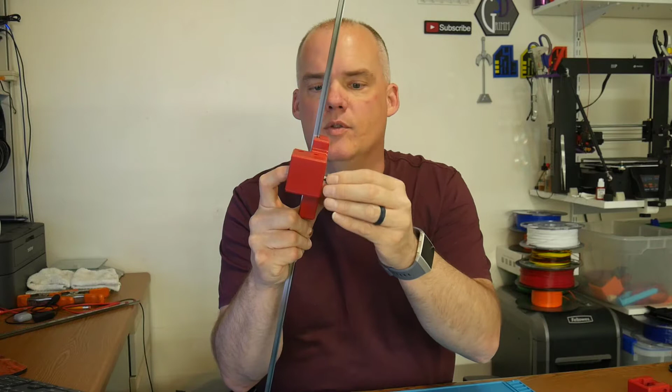And then this one is the first one that I've actually had that I could screw onto the carriages on the rail, had plenty of clearance on the end, so the rail moves up and down just fine. I still have not even tried to put this on the printer itself, but in all of them I've been able to create this little carriage right here that goes in there for the belt, and includes a nut on the back that will allow you to tighten or loosen the belt at will, which I think is pretty important as it pulls that shuttle in there and back out.

So that part worked perfectly. I was able to measure that and get that in there pretty well. But as far as getting all of these pieces, or this one main piece, all measured up and ready to go, let me show you how I did it. I don't know that it was the best way, but I'll show you my process.

I did the whole thing through DesignSpark Mechanical, as I almost always do. That software really works well for things like this, and I put a playlist up there wherever it goes for some help videos that I've got for starting out in DesignSpark. I don't have a lot of videos there yet, but they are coming.

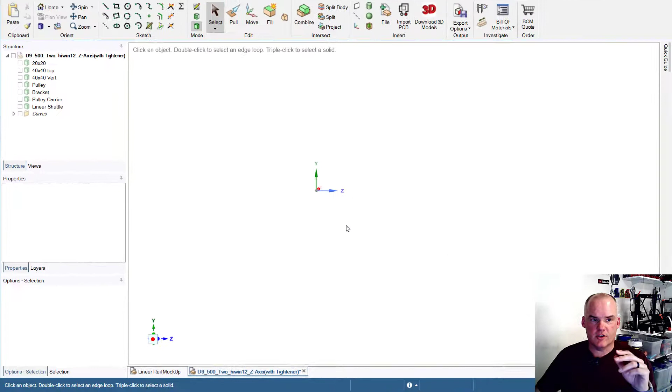Let me show you my process. So the first thing I started out trying to do here was I tried to create the printer space itself. I put together the corner with the 40 by 40s with the curves on them, and I've got the 20 by 20 linear rail right there that I need.

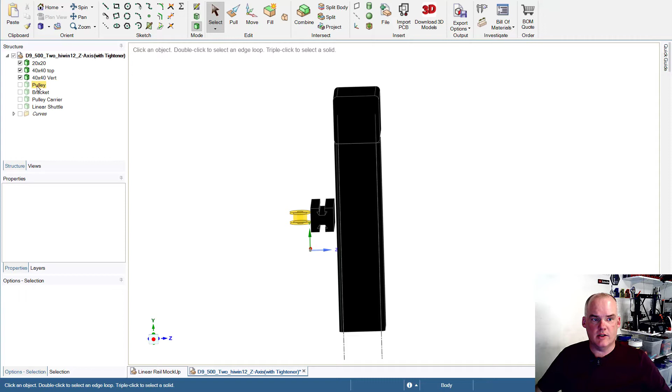I tried to make sure that I got the pulley in the same place for the tightener, and that I even had the linear shuttles where I needed them to go, with the linear rail right on the edge there. I colored them a little bit so I could tell the difference of what was going on here.

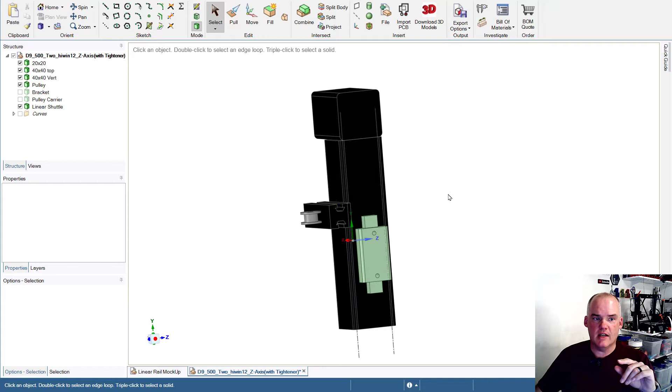And then I started to create things like this carrier around the pulley, so it looked nice. And then I've spent some time designing the bracket itself, which ends up like that.

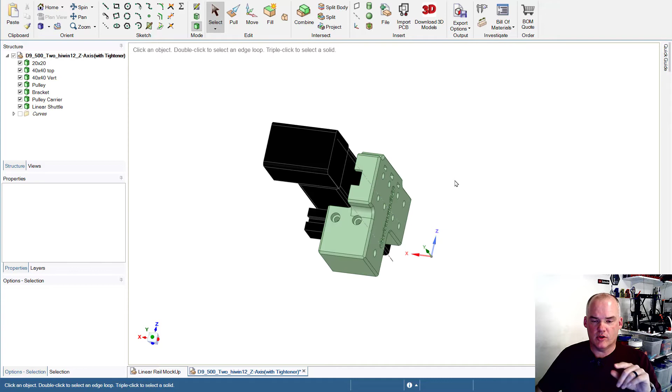So now I don't know why my edges along here were too long to begin with, but I tried at least 2 renditions with those being too long, even though my linear rail shuttle here is pretty much an almost perfect rendition of the shuttle itself. I just have 2 shuttles there, so I have the bolt pattern, everything I need.

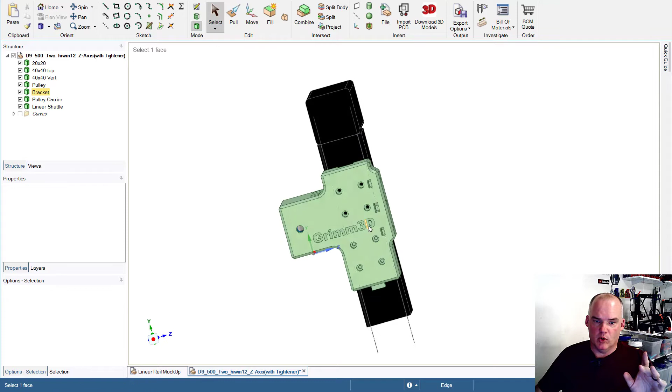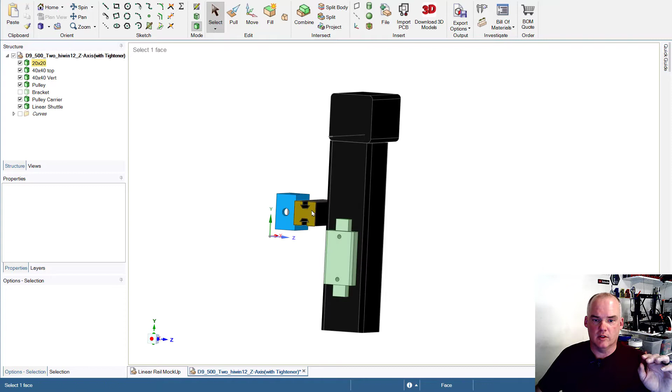I want the Z rail carriage to go bolt right on here. These 2 holes right here, top and bottom, would have been on the machine what go into the guide wheels, and this middle one would have been in a bar that goes clear across, a heavy duty bar that would have gone clear across to this 2020 extrusion and through there.

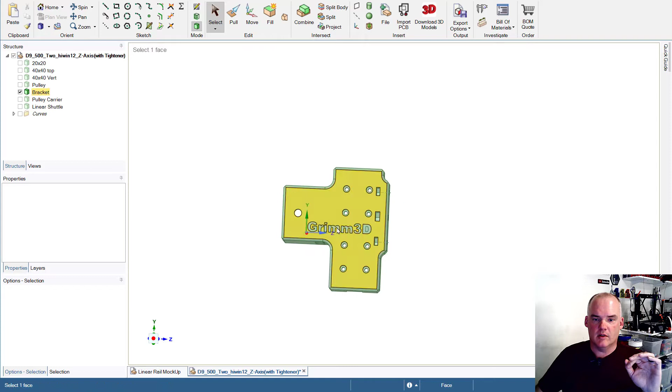So having done this and taken as many measurements as I can and trying to recreate the environment, I have then created this bracket. So if I turn all of those off and turn on the bracket, you can see how it turned out. I have places to embed nuts, which I didn't really embed.

I kind of want them to be pulled in and out. This middle one is a 5mm, and these top 2, I've gone with a little smaller screw because the actual Z carriage is threaded.

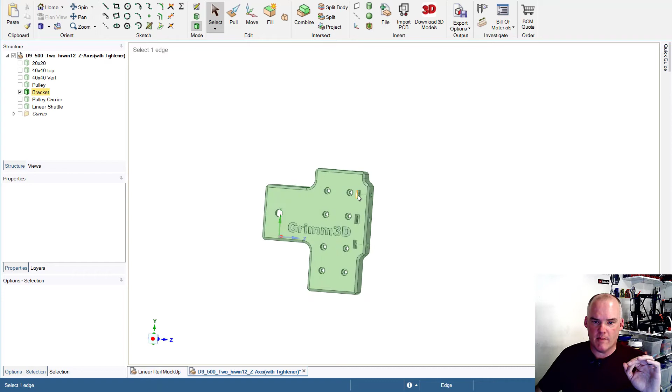I don't want the threads to grab out here on the carriage itself, I just want them to go through and grab that nut. Now I'm not certain of the dimensions between these nuts and the vertical 40/40 extrusion, so we're gonna have to check that out right now.

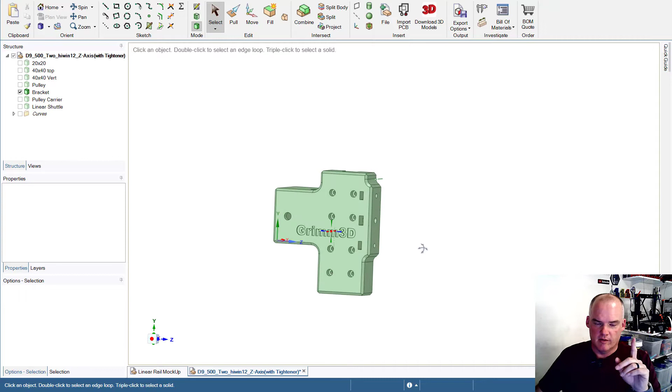This has not been on my printer yet, so you are gonna be here for its maiden attachment. If everything goes crazy, we might have to pause, adjust, and retry again later. But for now, let's go try to put this bad boy on the printer.

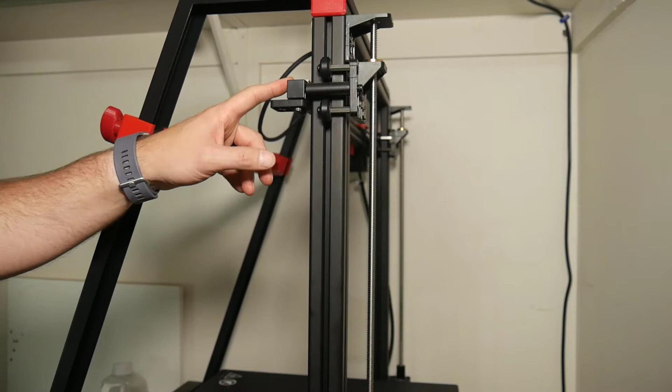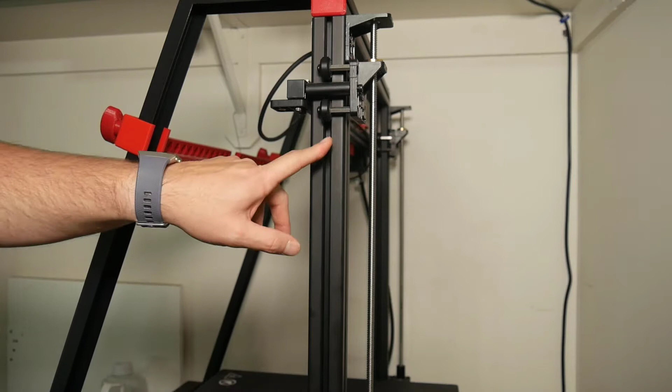In anticipation of needing to take this apart, I've already kind of started breaking it down. My belt is over here a little bit. I realized, however, that this is a 40/40 extrusion, and the only T-nuts I have for 40/40 extrusion use an M4 screw, or have M4 threads in them.

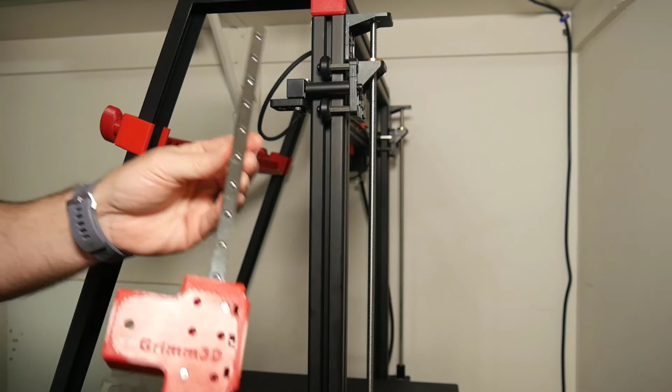And my rail here only has holes that allow an M3 screw to go through. So what I've done, and I hope this works, is I've just put an M3 nut on the back, and that's just kind of loose.

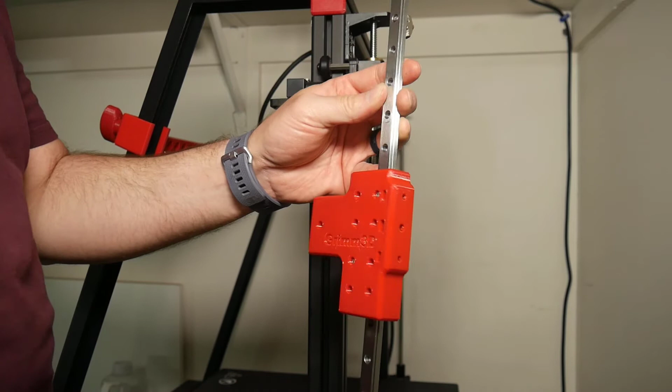Because remember, I'm still just retrofitting, trying to get this here to see if my bracket actually fits. I need these holes to fit, and pretty much everything to fit, because I decided to design a one-piece bracket. So I'm going to break the rest of this down. I hope those T-nuts hold long enough for me to just prototype this and see what I get. Stay tuned, I'm going to break this down.

Now I've taken off all of the guide wheels right here because I believe my design is going to be rigid enough that I don't need the guide wheels on the back. But if I end up needing them, I could probably add them again, but I don't know, it's all brand new to me.

These linear rails have no slop, either X, Y, or Z, no directional slop, nothing, so they should hold pretty rigid and work pretty well. So now let's see if we can get that rail on there temporarily with my makeshift larger T-nuts. I do have some proper ones being ordered, they're on the way. So if these work, it'll just be for today.

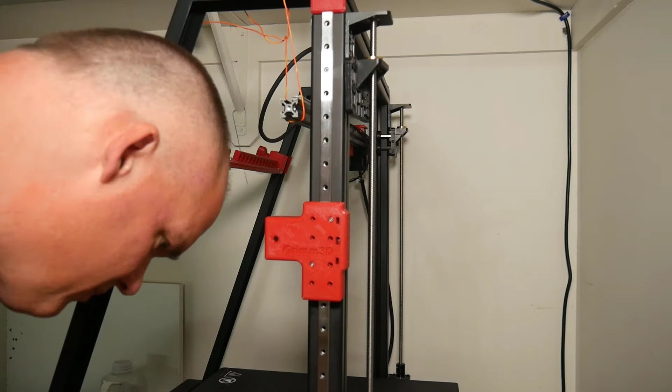Wow, I did get that one to catch, it's pretty nice. So I had to get one to catch on the top, and I got one to catch on the bottom. Now I've got my rail going up and down there, which is fine. I now need to actually pull this off of here so I can get this 2020 in its slot.

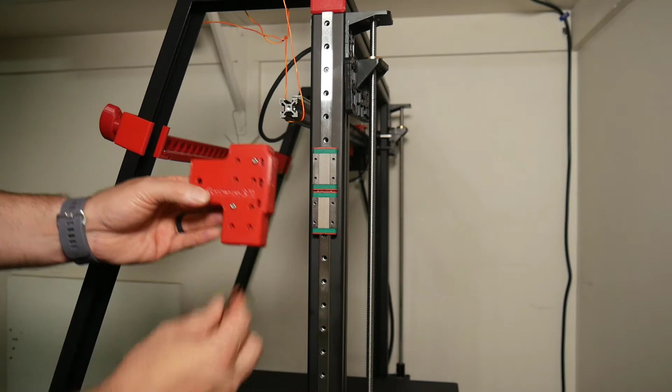So I can pull that off real fast. I only put 2 screws in there to make sure everything was measured correctly before I sunk all 8 screws in there. Which, to tell you the truth, my luck with this project, I kind of don't expect everything to be measured correctly. I'm gonna need some more T-nuts for this. Be right back.

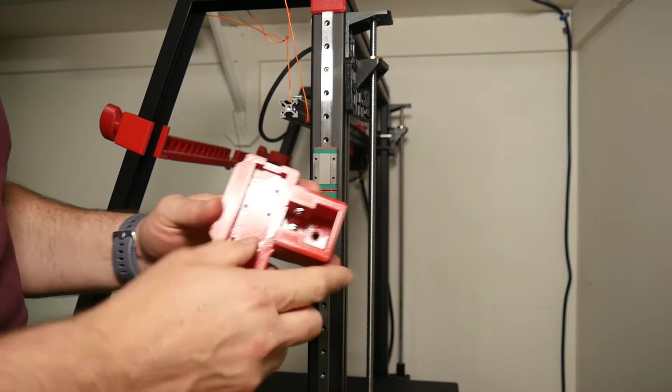So for this one, I'm using pretty much the T-nuts that came out of here. I'm only using a couple, even though I've got spots for 4, 2 on top and 2 on the bottom. I don't really want to put that many in before I know whether it works or not and all my measurements are correct or not. So I'm going to go ahead and slide this in there very carefully.

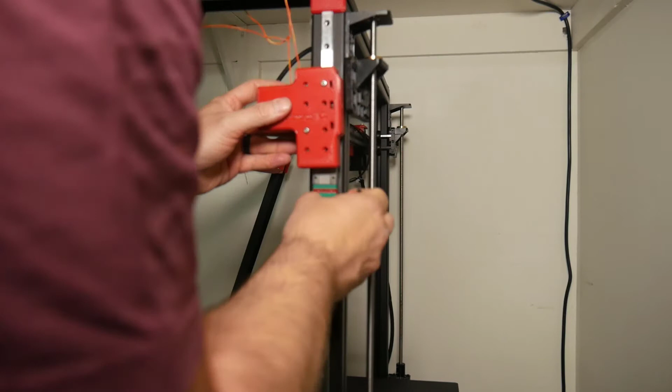There we go. Make sure that the carriages are in the right place. We're not quite on there yet. Go ahead and look inside there, see how my measurements are going. Looks like we're a little bit off.

It looks like the end of this top rail is hitting on my plastic right here, and that's preventing this from going on that little bit extra, which means I think I'm probably done.

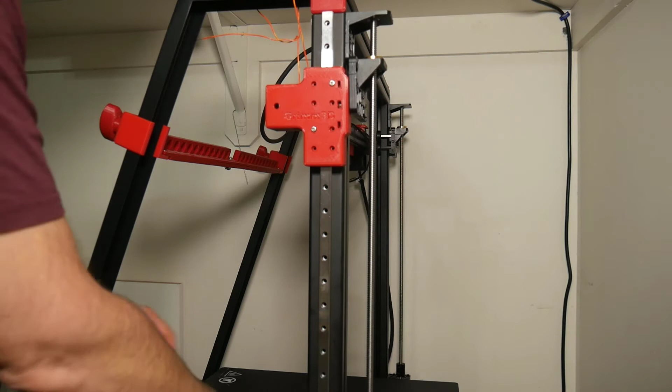I mean, I can put these on here, but I can't tighten them down. Nope, they don't even catch. So this is too far away.

That's hitting. So my next rendition, I think I'll just take a big chunk out of the top right here, and maybe I'll go with three T-nuts, one on the top and two on the bottom here. Or I could take the linear rail down and cut it, but I don't really want to do that either.

So I know I've got to take some top out of this. So what I'm going to do is actually just cut that out really fast any way I can. And then I really want to see if these screws that go in here actually line up with my screw holes there, because if I can make two changes at once, I'm going to make two changes at once, as long as I know what they are.

Now let's try that again and see if we can get it to seat all the way on there, or if my 2020 ends up being too long, which could also happen. Make sure a T-nut works in that back position.

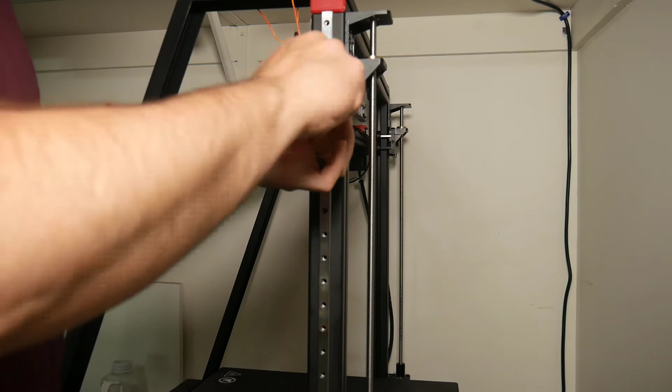That is pulling in a little bit tighter than I wanted it to. So this is off a little bit. I will have to make that 2020 sink in there a little bit further. I only missed that by about 5 or 6 millimeters on that rail.

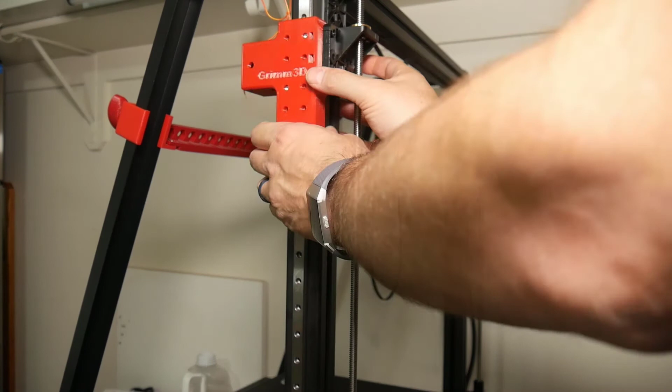And let's go ahead and look and see if these match up. So what I'm looking for is I've got 3 holes here. This one has a number 5, has a 5 millimeter nut in it already, which I hope to just use this 5 millimeter that came out of that hole.

Looks like that particular hole lines up pretty good. Let's see if my screw bottoms out, or if it can properly catch that nut. Looks like that properly caught the nut.

Doesn't look like it bottomed out particularly. Looks like that goes up and down pretty good just by grabbing it, which is pretty nice. That feels pretty solid. But let's see if I can get those other screws in there.

So for this one, I have decided, since this is an M4 that fits these threads, I could either drill out those threads, which I don't really want to do because if this doesn't even work, I might maybe go back to the guide wheels, but I've decided to just throw in there for now an M3 that should go through that hole and back to an M3 nut that's on the other side. So I've got a couple of M3 screws here.

That one doesn't seem to want to go in. That one will go in. Maybe I've got this bracket a little bit crooked. There is some play in it.